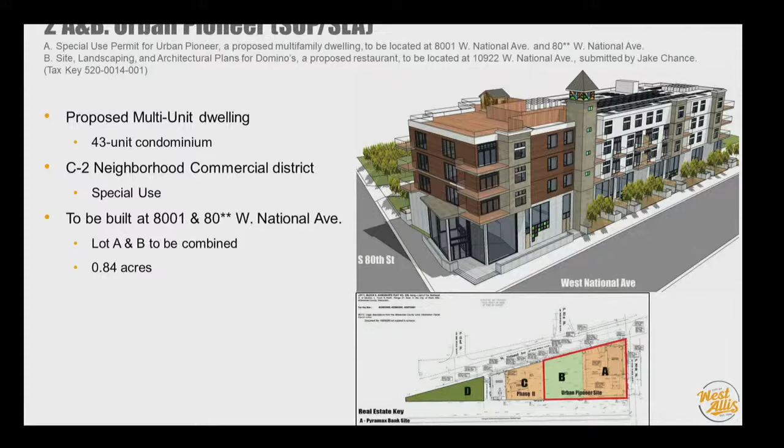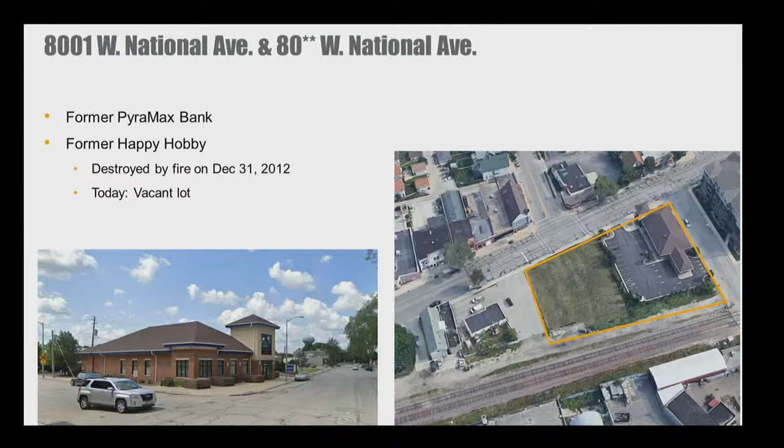This project is at the site of the former PyraMax Bank and former Happy Hobby, which was destroyed by fire on New Year's Eve 2012. Very dramatic. Today is a vacant lot, so it's been sitting there for approximately 10 years. These two sites, again, would be combined by a certified survey map to do this project.

So looking at the site plan, in orange, the building will be located at the northern half of the property. This is tucked up against the street front line to kind of create this active street edge there. The southern half of the property will be primarily for parking. There's an existing driveway off of South 80th Street right here, which residents will be able to use to access the site as well as deliveries and drop-offs.

There's going to be approximately 53 parking stalls. 37 will be underground and accessed by this driveway here. There'll be 10 surface parking stalls, and then there'll be 6 individual garages, which will serve townhomes on the first level. The number of parking stalls is below our minimum parking requirement, but staff will be recommending that Common Council waive the parking requirement, as this project is in line with our proposed zoning code's parking requirements. It also is well served by transit, walking, and biking, and it targets residents who may be less prone to having vehicles or having multiple vehicles, kind of more eco-conscious and more urban style resident.

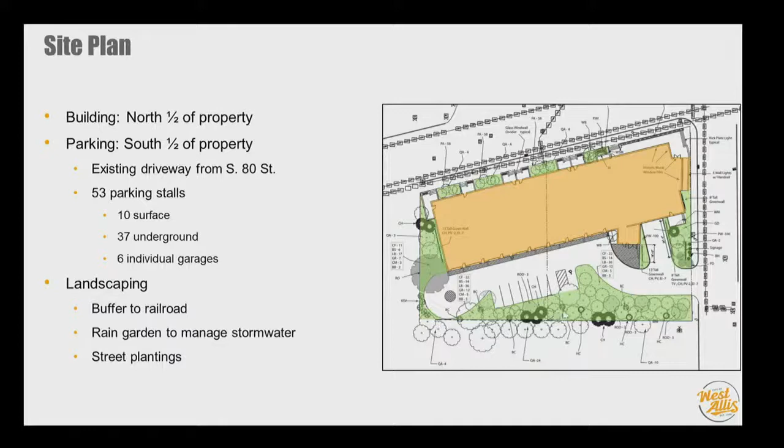The landscaping will be scattered throughout the site. It is going to be heavily planted, specifically in the southern portion of the site, shown here in green. This is going to function as a buffer between where the residents will be and the railroad located to the south. It will also have rain gardens to collect stormwater drainage off of the surface parking.

So getting into the architectural plans, the building is approximately 87,000 square feet, 5 stories and 77.5 feet tall at its highest point. The design team was inspired by the industrial roots of the neighborhood to come up with the materials and structure of the building.

As I've mentioned before, one thing this building does very well is activate the street and have interesting interactions between the public and private space. The first floor is inviting with this kind of transparent glass lobby here at the corner, a focal point along that street frontage. Then there's also lots of interactions between the building's private realm and the public realm of the sidewalk along National Avenue in particular, where there's these individual entryways and porches for the residents in the townhomes.

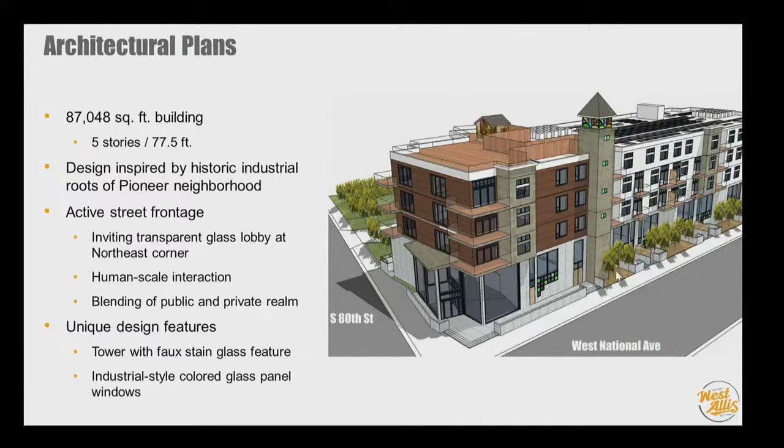There's also some unique design features we'd like to highlight. This central tower has a faux stained glass feature at the top, and there's these unique industrial colored glass panel style windows at each of these townhomes along the street front there.

Looking at the materials, the design team wanted to evoke the industrial heritage of the site, so they chose industrial type materials with a natural base of colors. We think these materials are a variety of quality concrete and cementitious materials, primarily Hardie board, glass fiber reinforced concrete, and smooth finish concrete panels. Those will be the bulk of the structure, a similar palette of different natural materials that will hold up well over time.

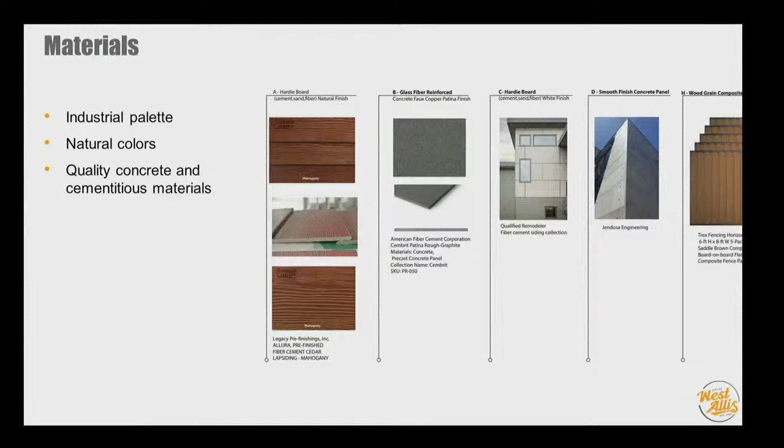Looking at the elevations, this top view shows the view from National Avenue, the north side of the building. This bottom view shows the south-facing side of the building, which is the view from the parking area in the back and from the railroad.

With this structure, the lower stories are functioning like a double height first floor. These first two stories will have the concrete panel base, intended to give an industrial strong base to the rest of the structure. This is where the individual entries and porches will be for the townhome units.

The upper stories will be clad in different Hardie board type sidings and some more cementitious paneling. There'll be white Hardie board around the majority of it, and the natural finish Hardie board will be on the east side, the focal point of the building above the lobby entrance. To provide a sense of rhythm there's the glass fiber reinforced concrete, which will have a copper patina finish, intending to evoke the industrial heritage of the area.

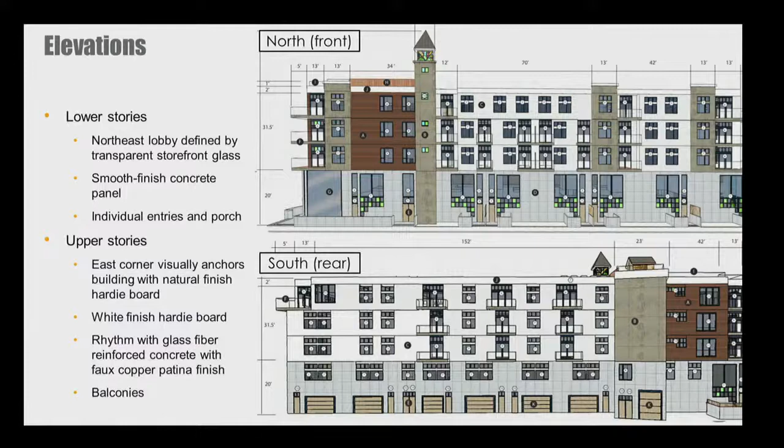Getting into the floor plans, there's going to be a diverse array of unit types in this building. There will be 8 townhomes, 6 with garages and 2 without, all located on the first floor. There will also be 12 micro condo studios, which are very small studios, 9 other studios, and then a mix of 1 and 2 bedroom units.

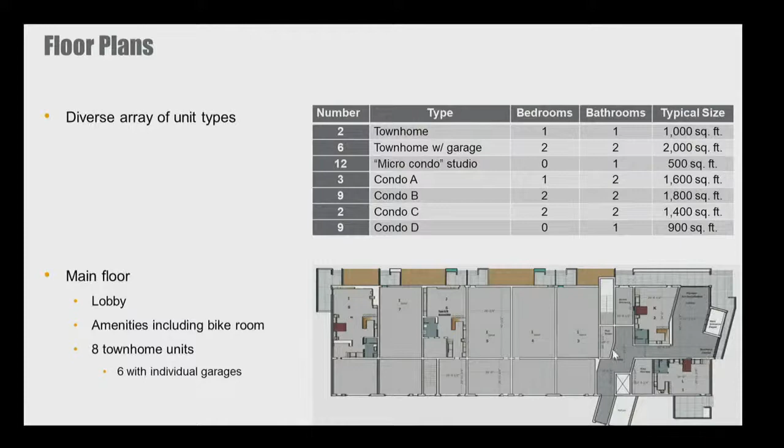Looking at the main floor here, we also want to point out that the lobby is located on the east, the northeast side of the building. There's also going to be a bike room for bicycle storage.

We do not have pictures of this on the screen, but the rooftop will have a unique amenity as well. There'll be a rooftop deck for residents located on the eastern half of the building, and a solar panel array on the western side, which will supply energy to the building, serving as another amenity that reduces energy costs for residents and provides a green selling point for the building.

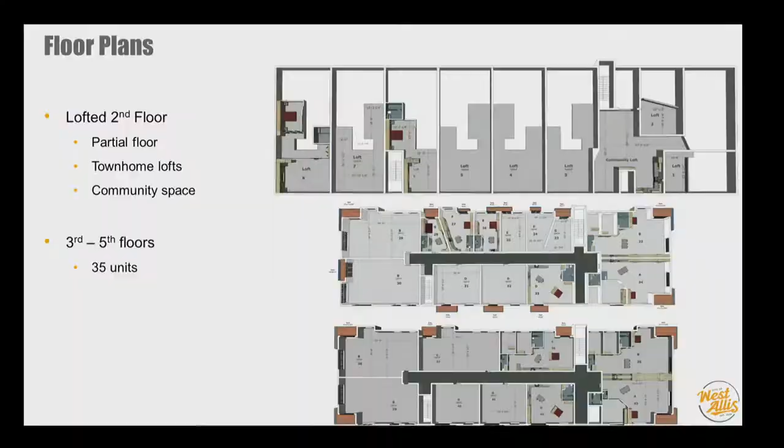Staff recommends approval of this project and its site landscaping and architectural plans, subject to the listed conditions, including a couple of revised plan conditions which have generally been met. One item still needing further review is a revised landscaping plan approved by our forestry department, and an exterior lighting plan. A certified survey map is needed to combine the lots into a single parcel. We will also require a surety bond, documentation showing compliance with our stormwater management ordinance, and a utility plan. Last but not least, the common council will have to approve the special use.

So now, if the plan commissioners have any comments or questions. That's the end of the presentation.

Any questions? Move approval. Second. Okay, there's a motion in front of us. Any questions or discussion on the motion? Hearing none, all in favor, please say aye. Any opposed? Ayes have it, motion carries.

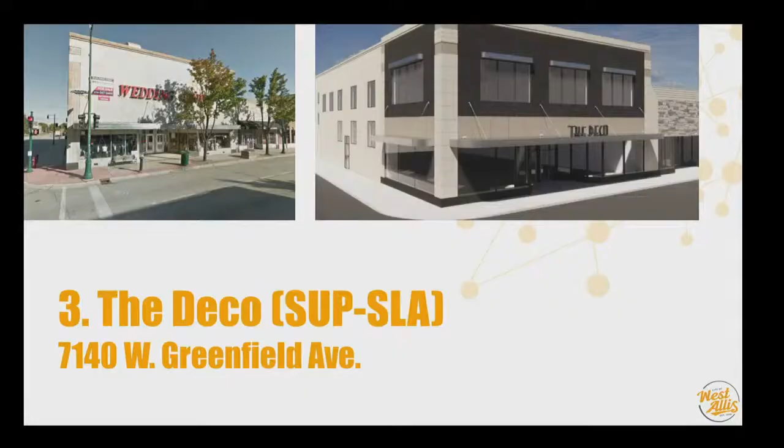They rented tuxedos and similar wedding type of fare. In that theme of weddings and events and corporate events, Mr. Holtz purchased the building in about 2017 and operated it as an antique store for a short period. He's got a different path he'd like to take now with the building, and that would include this event space. It's about a 20,000 square foot building, fronting Greenfield Avenue at the intersection of 72nd and Greenfield, on the south side of the street.

The property is in our downtown, zoned C1, Central Business District. This type of use does require a special use for any building over 5,000 square feet. If you're creating an assembly, such as an event space, that triggers a special use.

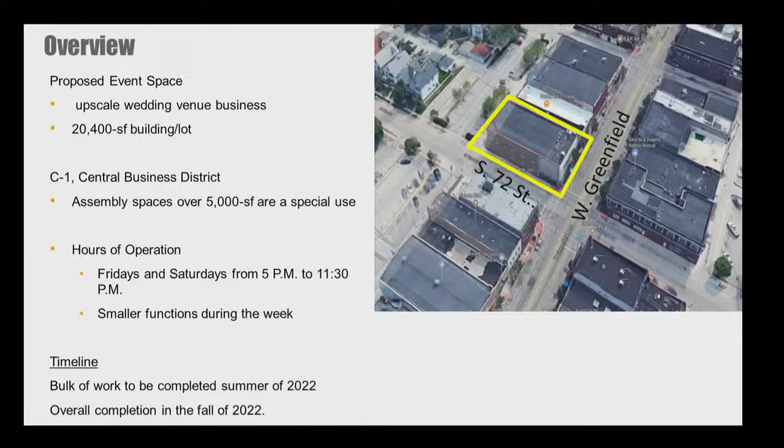The hours are primarily going to be Fridays and Saturdays, weekends between 5 p.m. and 11:30 p.m., for hosting wedding ceremonies as well as receptions. There would also be the opportunity for other parties and corporate events, typically smaller functions, which could also happen during the week. The timeline for the work is substantial completion this summer, with the overall bulk of the work completed later this year in the fall.

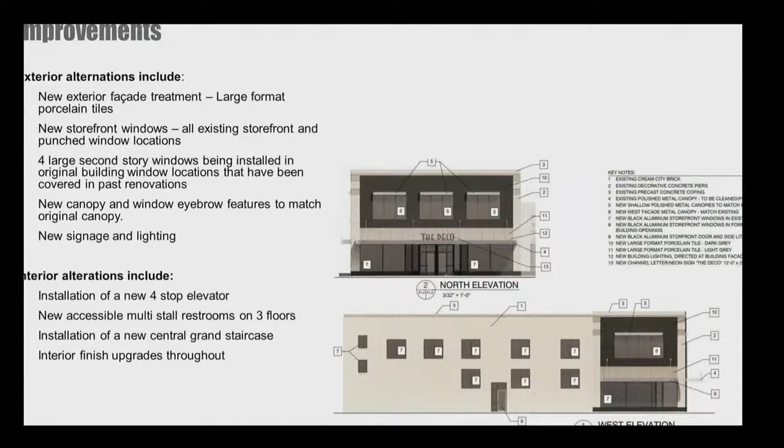Some of the alterations that are planned, this is the north elevation and the west elevation of the building. Primarily a lot of new storefront windows, all of the ones on the north elevation and west elevation.

New windows would also be added on the west elevation of the building, along with new polished fascia on the canopies. The existing bracketed canopy would be maintained and updated with a new stainless steel finish. Above, on the frontage, west and north elevations, there would be new eyebrow headers above the larger windows on the second floor, carrying the theme up from the first floor and completing the upper look.

The design solution the architect created for the north elevation, as well as that portion of the west elevation fronting Greenfield Avenue, involves removing the aggregate siding installed sometime in the 60s or 70s, and replacing it with porcelain tile. There are two different colors of porcelain tile, item numbers 10 and 11 on this plan—a dark gray and a lighter gray. The lighter gray goes between the stainless steel canopy and the darker gray tile, with the darker porcelain around the second floor windows. Aside from that, there is some new signage proposed on the front of the building.

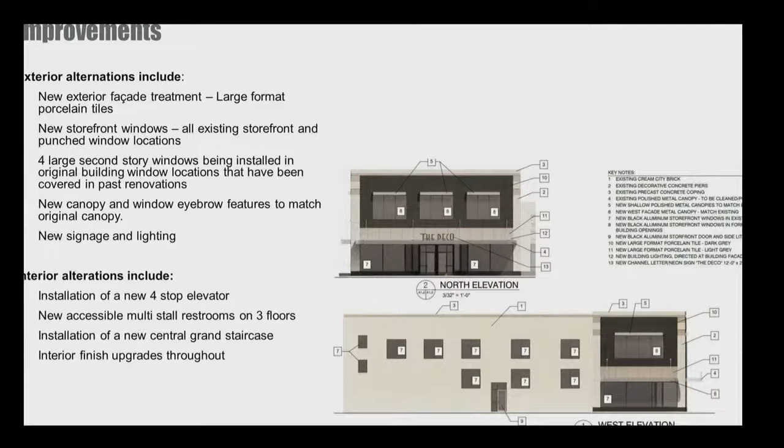Other interior updates will include a 4-stop elevator within the building, accessible restrooms, and installation of a new grand central staircase. There's a central staircase in the building now, but that would be replaced for a grander appearance between the first and second floor balconies, plus interior finish upgrades throughout.

I don't have images of the floor plans in this presentation, but in the staff report there are floor plans indicated. Going through that, there are more or less 3 floors and a basement.

The basement's going to be set up for a lounge and preparation area prior to an event. If you're having a wedding, the groomsmen and bridesmaids can have their separate quarters and areas to hang out and prepare for the event.

The first floor will be used for the reception area, and the second floor is sort of an overflow reception area, a balcony area with open views to the first floor down below and that grand staircase.

Going up another floor to the third floor will be where the ceremonies would be held for weddings and so on. Aside from that, I think there's another floor, but that's just storage at this point.

It's a very interesting building with a past history as a department store. The improvements being made here are quite notable, and it's going to be a welcome change to our downtown and a destination type of use.

In terms of parking, there may be some concerns, of course, and one of the recommendations in our staff report was to ask Mr. Holtz and his team how they foresee parking taking place.

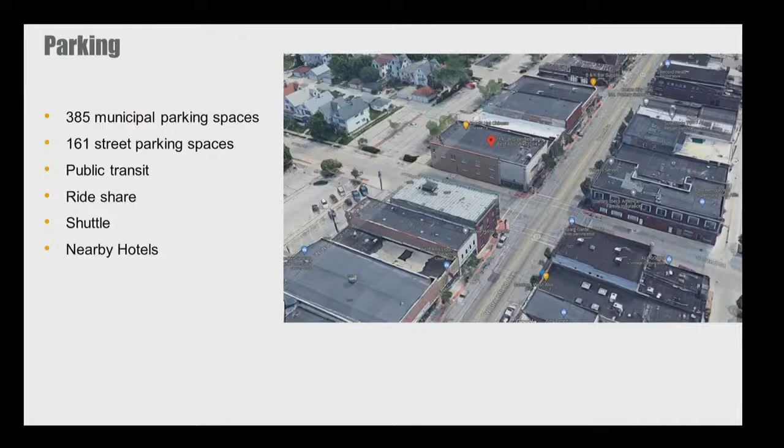We'll want to know the location of dumpsters. In the past, dumpsters have been placed right behind on the south wall of the building, between the alley and the building. That could potentially be the case for the future of this space as well.

Other ideas could be to perhaps even take out a couple parking stalls within the downtown West Allis off-street parking area to create a more consolidated refuse plan. But we'll work that out. We've got that as a condition of approval, just to figure that out as we go.

Staff was also interested in identifying within the kitchen area on the first floor—actually, it's not a kitchen, it's more of a caterer prep area.

They're not going to be doing any cooking on site. All food or drinks will be brought in with a caterer, then kept warm or cold as needed on site, and arranged within the hall. So we're just calling out that kind of ask.

Our health department typically likes a lot of what they call sinkage, so we're just advising the applicant there. On the west side, there's a door proposed in the west elevation of the building, likely an exit door. Our building inspection department suggested trying to line up the floor level of the inside of the building with the sidewalk right outside. It may be difficult, but there could potentially be a ramp or some other accommodation outside the building to gradually offset that distance and grade. That's something we'll be working on.

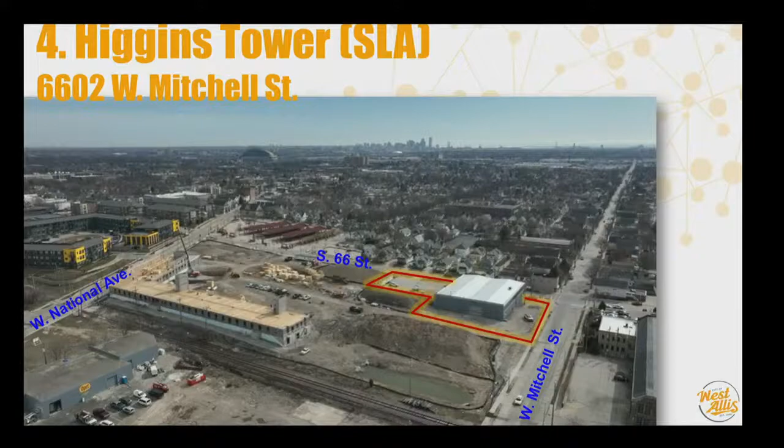So Higgins is here to stay, and they're proposing some site improvements, which we appreciate. It's going to look very nice for the future of this neighborhood. Just another view - these are fairly recent drone pictures from, I think, Bob Monnett's drone, and he's flying around.

So this is the general land area for Higgins. There's roughly about - right now I think there's a little bit less frontage, but they're in the works of acquiring some additional land to the west here from the city's Community Development Authority, and there's going to be roughly about 34, 35 or so feet west of this building, to the extent of the west property line.

As you know, the Lofts development is going to have access here from not only National Avenue and 66th Street, but also from Mitchell Street. And then Higgins currently has access as well from Mitchell Street, at 2 points on Mitchell Street, and they're going to maintain those two areas. This west driveway here is going to be modified to accommodate the pulling in and backing in of trucks to a west door. And then this driveway over here will be maintained.

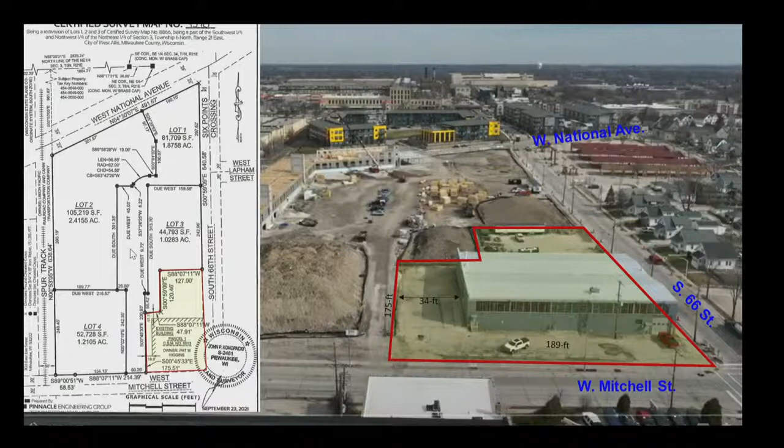The big change here is going to be some landscaping added at this southeast corner, as well as along the south property line. We'll get into that in a little bit. This is the certified survey map that Planning Commission and the Common Council approved last year in 2021.

Getting into the architectural changes, this is an older picture of the Higgins building. It's since been repainted a darker gray color. The nice change here is that they're going to be adding a bracketed canopy over the west overhead door. The building's actually really cool, with some nice upper windows that allow in a lot of natural light. It's got a nice presence on the street frontages, so this canopy is just a nice change on that west elevation.

In terms of landscaping and paving, the bulk of the work here, scoped from the applicant, is going to be pavement maintenance, basically replacing pavement, a lot of which has failed. So they're really doing property maintenance, fixing up the paving of the property. They're restriping it and reconfiguring the parking.

Right now parking stalls are configured along Mitchell Street, and with the repave and restripe, they're going to put the parking stalls alongside the building. They'll have access here and here. They're also going to put in a grass terrace between the city sidewalk and the curb, and add some landscaping on their property for curb appeal between the parking lot and the building. This is where that bracketed canopy is going to go on the west side.

They're going to have roughly 34 feet between the building and a new fence line. This orange line represents a new 6-foot tall wood fence they'll be installing on the west side of the property. We've asked the Higgins team if they could scale the fence back about 20 feet so it's not coming all the way out to Mitchell, which will help promote better visibility pulling in and out of the Higgins property, as well as the Mandel driveway that goes to the Lofts and Makers Row, for safety and convenience.

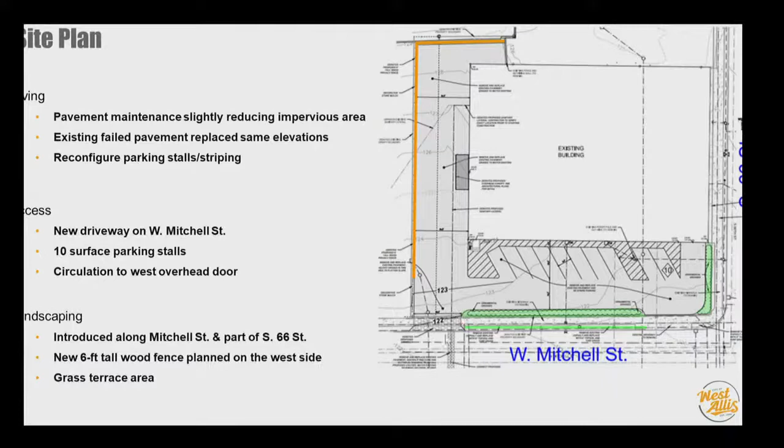In our staff report, we are recommending approval, but on the north yard, the property improvements are largely taking place on the west side of the building and the south side of the building. What we're recommending to the Planning Commission is that in this north area, north of the building, the storage yard is going to remain, currently fenced with a 6-foot high chain link slatted fence. It does have some barbed wire, and there's a retaining wall back here.

This landscaping is from an older picture, but there's been more recent development—another view looking west from 66th Street. This is a more current image of that north storage yard, and the surrounding scrub growth or landscaping that was once here is gone. It was on the Mandel, or city CDA property, and Mandel is doing a lot of moving of dirt and grading over there, so that's just a big dirt pile right now.

The city would like to work with the Higgins team on adapting its plan and scope of work to include this north yard as part of a landscaped perimeter area, replacing the chain link fence with perhaps a new wood fence, and also putting in some perimeter landscaping.

In terms of what Mandel is proposing, they're primarily focused on their existing construction project, the Lofts, which is currently underway, being built along National and the railroad spur. But in this area here is going to be a surface parking lot, and they do have landscaping here—there will be some perimeter landscaping on the east side of the Loft property.

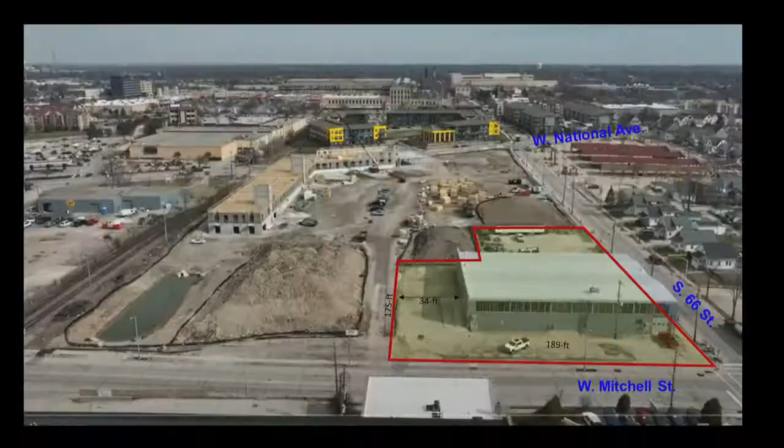And so we very much appreciate how, on a matter of planning, there could be a better way the north yard could have perimeter treatments. There could be things that could be done. But the reality is the condition of the pavement and the fencing, it is fine, it is functional. We need it for storage.

Again, I appreciate the design where Steve showed where the landscaping could go. I think Colette almost fell out of her chair, because we need space to store things in an M1 industrial area. And so every square foot is valuable and is necessary, and that's just the business that we're in.

From our standpoint, doing enough development work, when a change is coming, and you saw Poblocki, you saw some of those others, okay, we're doing a big addition, or redeveloping a site, that's the perfect time to accommodate a lot of that. For our north yard, it's really a hardship to essentially double our project scope, pinch our property even more, and create more landscaping and fencing in a functional area we were never even thinking we would do.

But we certainly understand how the staff would flag it, would make a recommendation. I'm here to request that recommendation 1A on the updated landscaping and screening for the north storage yard, and 1D, removal of the barbed wire fencing, be removed as approval conditions because they're just not appropriate and related to the project scope in front of you, which is really to address the Mitchell Street side, the west side.

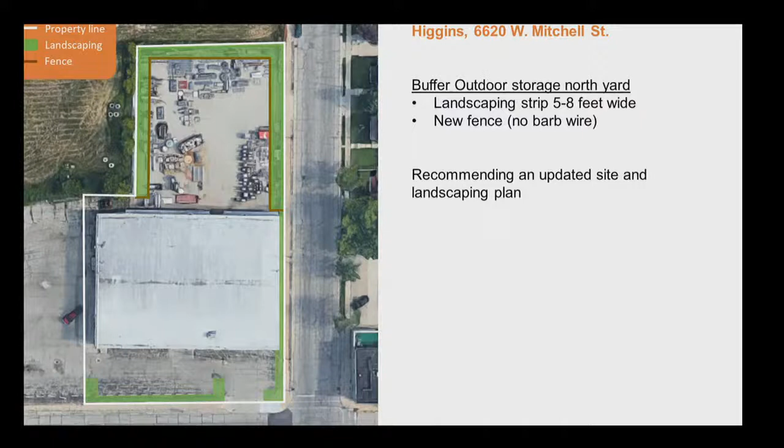And then when you go to the west side, where the poured concrete wall is, all those fence posts, corner posts, all of them throughout are buried down in. And when I say buried, I'll tell you that Mr. Higgins, the owner, was a Navy man, and I'm telling you that wall doesn't move, and those posts don't move. And it's low - the area is lower than the grade of this pavement. My parking lot back there is a good 4 feet from where that is, probably this high on me. So that's looking back at the side of all that landscaping.

This was prepared as just a visual concept of what it could look like, and we're very open to working with the Higgins team to look at a variety of solutions for how that could actually functionally work out.

Based on what they're saying, that side wouldn't work for landscaping. I think the options to consider would be maybe looking at just along that one side along the street, or doing a modified fencing or something like that. But it's up to the planning commission to make that decision.

We understand the recommendation, but truly, and I don't want to emphasize the financial piece, because it's a functional piece. The storage yard, it's not a glamorous name, but it's a storage yard. We need the storage, we need the space, and we also need to secure the space with fencing. But everything does have a cost.

Right now, our $100,000 project has $16,000 of fencing with the wood fencing. We start adding those incremental pieces, and that's why we get to doubling the project cost when we're not touching the north storage yard. We don't have the pavement failure there, we don't have to acquire land there.

We'd like to have the discussion, and maybe it gives us the idea of when and if we do something, or in 10 or 15 or 20 years, maybe the Higgins site will be redeveloped into something else. Those are all common sense things. Maybe the city shouldn't be doing something that could create a barrier or prevent other things because there's too nice a landscaping in a certain area. So the reality is nothing's forever.

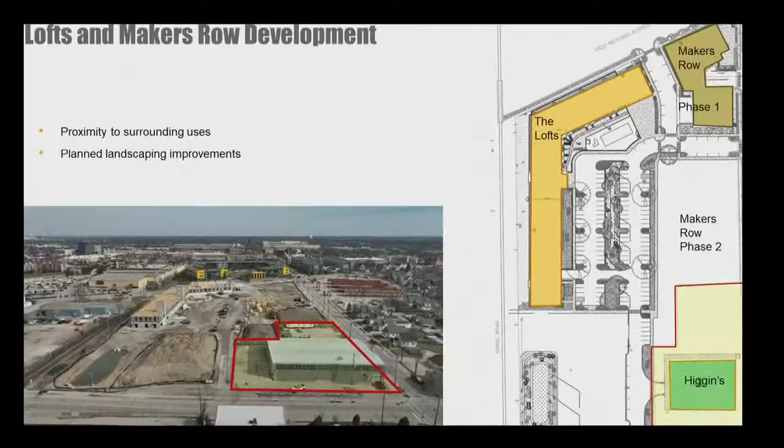He is. I think I would be good with that, yeah. That's one vote, but we don't know about the rest of us. I would be good with that too. That's two. Not with me.

I want the parties to get together and resolve this, because the applicant would like to have this pushed out indefinitely, and you would like to have something done now—not to the extent you've laid out, but at least a compromise. So go get together, compromise, and come back to us.

I don't know, Steve, I think this is a better compromise. What do you think? I guess we've got it one, two, three for the fence on the west, and I guess it's a step in the right direction.

From the staff perspective, is it the existing fence that's a problem on all three sides, or what are the concerns? Do you think the new development won't be able to do landscape screening to essentially hide it? Sure, they will.

Forget about Maker's Row and the lofts for a moment—if that weren't happening, would we still be interested in doing something in this north storage yard? Would we still have a similar recommendation? I think the answer is yes. We'd still want an improvement to the barbed wire chain link fence and like to see it replaced with something new. So a fence upgrade is a yes from the planning perspective.

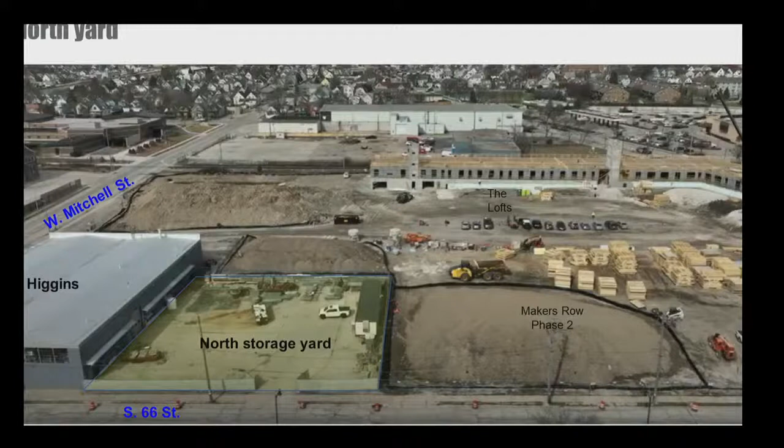There's going to be a practical reality, and I'm hearing a lot about Maker's Row Phase 2. We don't know what it's going to be, but I have concerns that if we adopt staff's recommendation, we could end up with a botanical garden on our property while looking at their dumpsters and back of house. That's today's reality, which none of us know.

They could landscape on their side if someone's front window looks right out at our storage yard, but to Colette's point earlier, we've been there first, we've been there forever, and we appreciate the progress and development in the area. But West Allis, as a proud community, just like a proud company, you don't want to push people out, you don't want to say you're not open for business.

Our zoning is a permitted use—storage yard is a permitted use—and we're trying to make incremental improvements. Through Colette, and probably conferring with Mark, we're able to add more wood fencing along 66th Street, which will add to our project costs but be part of our commitment to the community and the neighborhood.

Does anybody want to make a motion?

I would move to approve, with the replacement of the fencing along 66th Street as one of the conditions. So we would take out items A and D? I think it's here, let's pull it up and make sure we get this right. Item 2A is basically updated landscaping screening, so I guess an updated plan to include—insert the word here—something around a new fence.

A new fence on the 66th Street side, on the east 66th Street side of this north storage yard. And then we could strike D, because that would be included in A. We're looking at saying new fencing in part A along the 66th Street side.

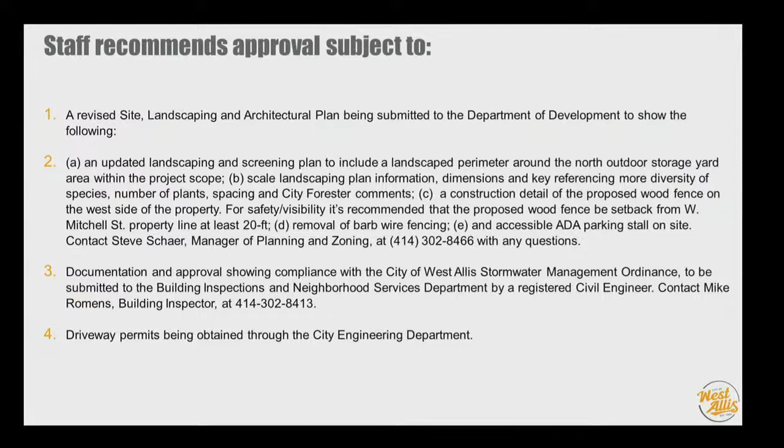Was the 2A intent specified for the type of fence? Was it wood? We would like to see the chain link fence replaced with a wood fence, to match what's being installed on the other side of the property. Got it, because that's what I heard earlier too. I was going to say wood fence.

Okay, all right, now I second that. If we really want to save him money, let's vote on this so we can get Brian out of here and off the clock. Love the guy, don't get me wrong.

Any other discussion? All in favor? Aye. Aye. Aye. Any opposed? Nay. Okay, I'll vote aye. 4-1, motion carries.

Thank you very much. Thank you. All right, thank you. Thanks, Brian. Thanks, Colette. Thanks, Brent. I think that's a good compromise.

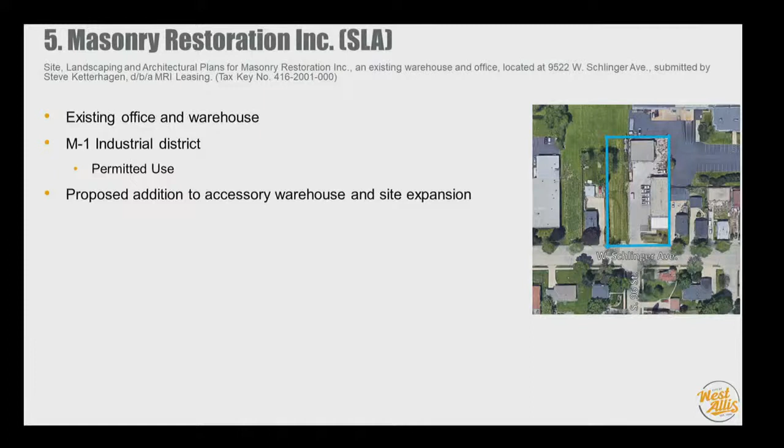Thank you. So this is an existing office and warehouse, zoned M1, located at 9522 West Schlinger Avenue. It is a permitted use, and they're proposing to add an accessory warehouse and expand their site of operations to adapt to their growth. Masonry Restoration Inc. has been located here for approximately 30 years.

They're a construction company and do masonry repair, typically for large buildings. You'll see them doing work on facades in downtown Milwaukee frequently. This location is their company headquarters, primarily their office, but they also run their operations out of there, storing equipment, vehicles, and materials in their warehouse and yard.

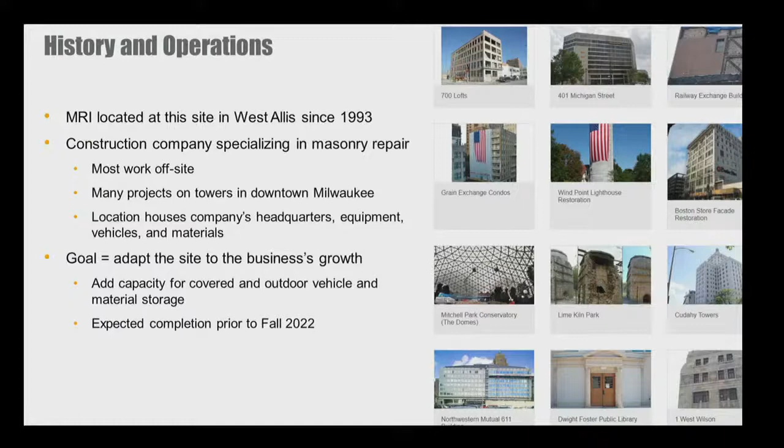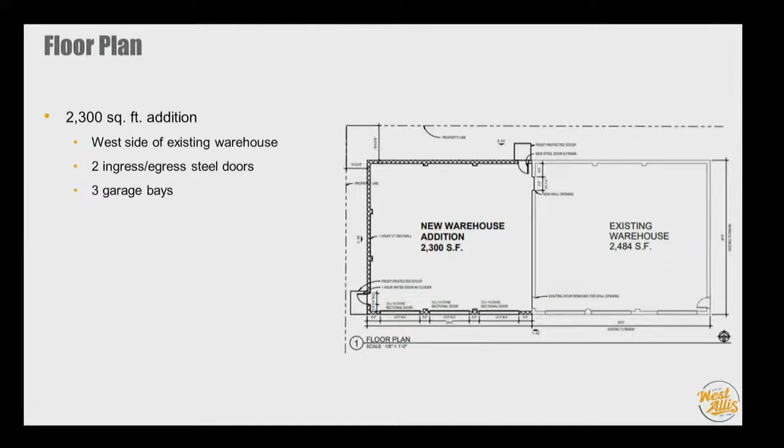Their business is growing, so they want to adapt their site to that growth and add some capacity for storage. They expect to complete this project in the fall of this year. Simply put, the bulk of this project is just a warehouse addition, nearly doubling the size of their existing accessory warehouse. It's very simple architecture, with 2 ingress and egress doors, 3 garage bays, and just an empty space inside.

Architecturally, it's masonry matching the existing warehouse. At its tallest point, it is 18 feet tall.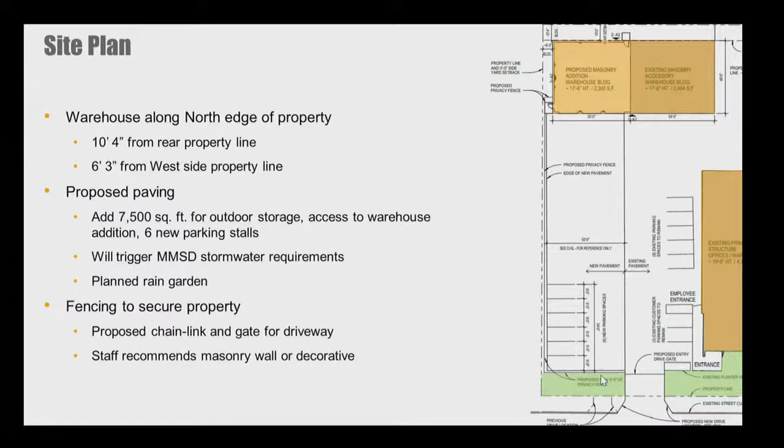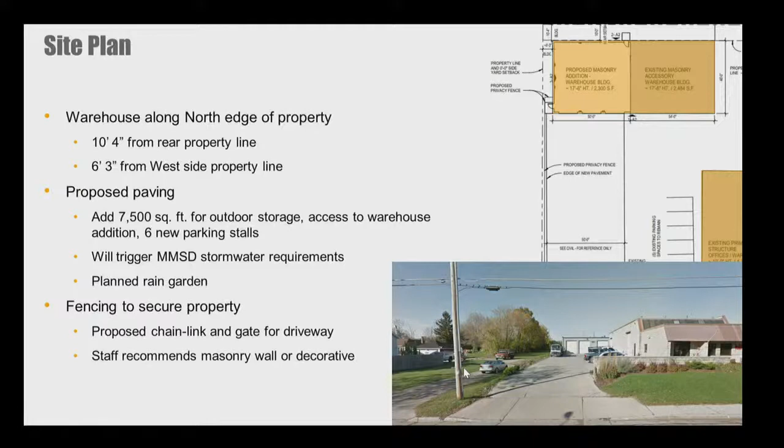So here's a look at the existing conditions. This driveway is actually no longer there. I believe it's just kind of more like this grass lot over here. This is their masonry wall and landscaping. We're recommending that they match that type of masonry wall or have some other decorative fencing that they can work out with our staff instead of just doing chain link.

That kind of wraps it up. So just a summary of our recommendations: we need to see some fence details, entrance gate details, then update the site plans to show a decorative fence or wall and some details. We'd also like to see some trees for screening from the residential site, a landscaping plan approved by forestry, and then just indicating where their proposed storage is going to be, their outdoor storage on the site.

We also need to see a civil plan with their stormwater management, which they're working to get to us, and then just making sure that they're in compliance with their stormwater code. We will then also be requiring a surety bond as part of this project.

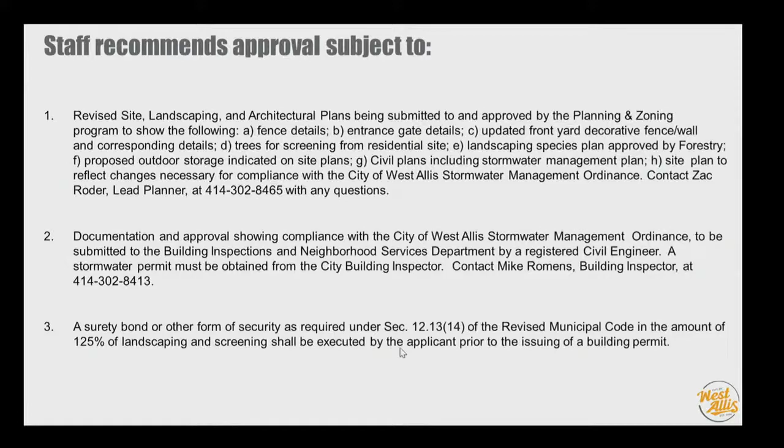Any questions or comments? Have you discussed the wall with them, or is this new? We have made them aware of our recommendations, and they haven't had any big objections against these things, so they're aware of what we're recommending today, and haven't had any significant comments.

Any other questions? So I'm assuming that they're willing to do those recommendations as well. If not, they'll be back. Yeah, I'd move approval.

I'll second. Okay, there's a motion and a second. Any other discussion? All in favor?

Would you prefer for condition C to be limited to the decorative wall to match the other side? Do you want to remove the fence as an option, or do you want to leave that in there for discussion with them? We actually expanded it to be fence or wall. After some discussion with them, they wanted some flexibility to kind of look at things. Okay, as noted, thank you.

Okay, if there is no other discussion, then all in favor please say aye. Aye. Anybody opposed? Ayes have it, motion carries.

All right, so this 6th and 7th items we would like to take together. So this is the city zoning code and zoning map.

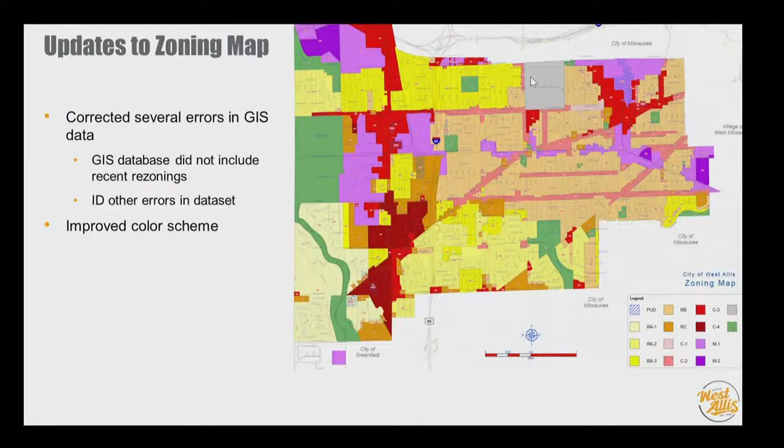Our commercial districts will range from light pink to dark red, manufacturing from purple to dark purple, parks green, and state fair to gray. So just some changes there to help clarify what the districts were. I know our previous map was at times kind of difficult to read and distinguish between those districts, so that's one change we wanted to make as well.

At this time, is there any comments or questions? I think there was one other, did you? Oh, that's great, there's one I almost forgot. Oh, this one, yeah, good.

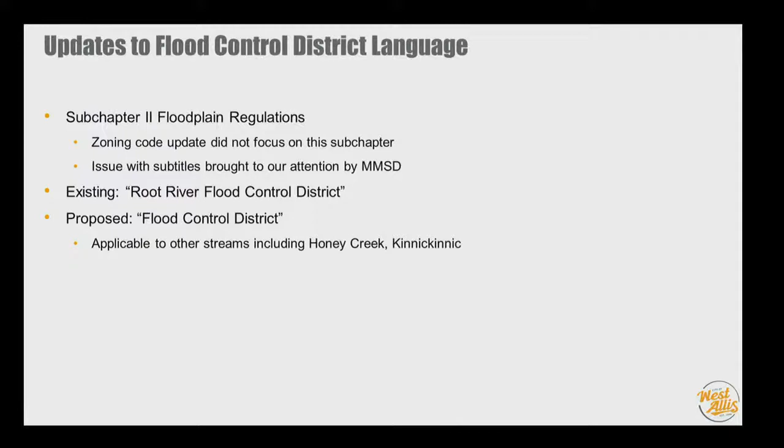Right now it's called the Root River Flood Control District, and we want to change this to just be Flood Control Districts so that it more clearly applies to the Honey Creek and Kinnickinnic rivers, which are found in West Allis. That is a change we would recommend. Staff recommends, Planning Commission recommends, that the Common Council adopt along with the ordinance.

Any questions? I don't think so, I agree. All right, what do you need from us? Do you need us to move to approve? Recommend approval, move to recommend to Common Council. I'll move. Okay, second.

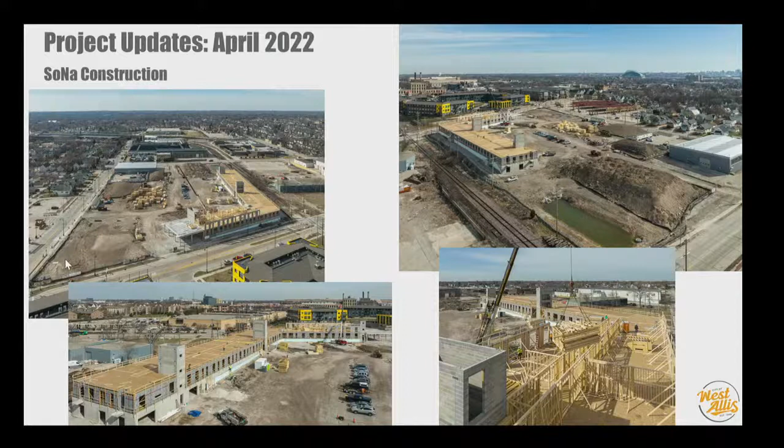Also, the two gas stations we had approved last year, one on 84th and Greenfield, another on 84th and Beloit. Zach and I had a meeting earlier today with Gary Nagra, the owner of both of those sites. He's doing some of his due diligence right now, soil testing, soil borings, and the 84th and Greenfield site showed up as clean. Next month they're going to pull their demo permits to start demoing the home next door and the old gas station, and then build the new gas station at 84th and Greenfield.

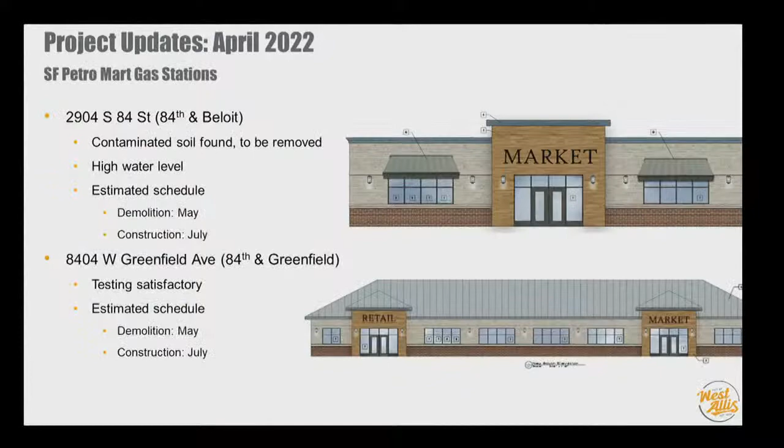On 84th and Beloit, they did run into some contamination and soil issues that they're working out. Nothing major, but it might take a little bit longer before they get to the demo. But ultimately, construction in July. If construction starts in July, will they be disrupting any traffic flow at State Fair?

Most of this, I don't think so, definitely not for this one. It's all going to be pretty much on site. I guess we'll have to talk to them a little bit more about sidewalks, make sure they're not blocking sidewalks and keeping it contained, with all that walk-up traffic. Unless they're going to be done by August 2nd. Yeah, right, and I was going to say, for the safety of the pedestrians coming back and forth too, because I know how busy that area can get during State Fair.

Fair, yeah, that's a good point. We'll carry that forward with Gary.

Our Ethiopian Cafe has been working with, I think Kiva has reached out to them, but also Patrick and Sean in economic development were able to work with them and get an economic development grant approved for the new coffee shop. Building permits have been applied for, and they've satisfied the plan commission conditions of approval. Then the Domino's Pizza special use was approved by council last month, for the old Menchie's Frozen Yogurt location.

Aside from that, we've been following up on some enforcement issues with rope lighting throughout town. It seems to be making a resurgence, the LED window frame lighting throughout the city, so we're following up on those issues. We're ringing on Dollar General's bell to get closure on that metal siding on the west elevation of their building - it's still there, and we're asking them. I did manage to get their attention, and they are going to get back to me on that.